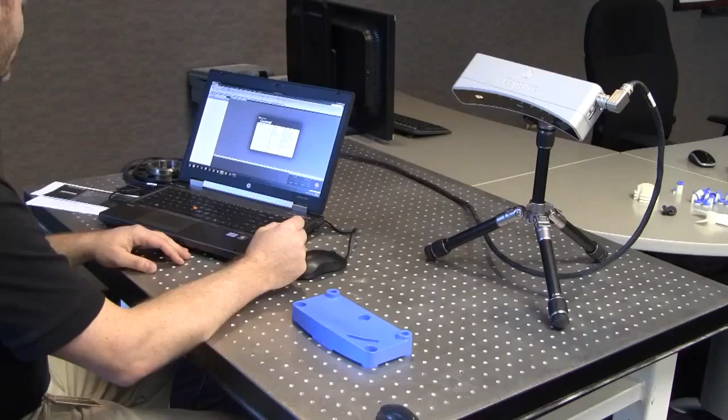The scanner is the Capture scanner. It's a LED blue light scanner with a 300 millimeter standoff, and the depth of field of the scan is 180 millimeters, from front to back. At the front of the field of view and the rear of the field of view, we have a diagonal measurement of 172 millimeters and 260 millimeters, so you can scan nice sized parts.

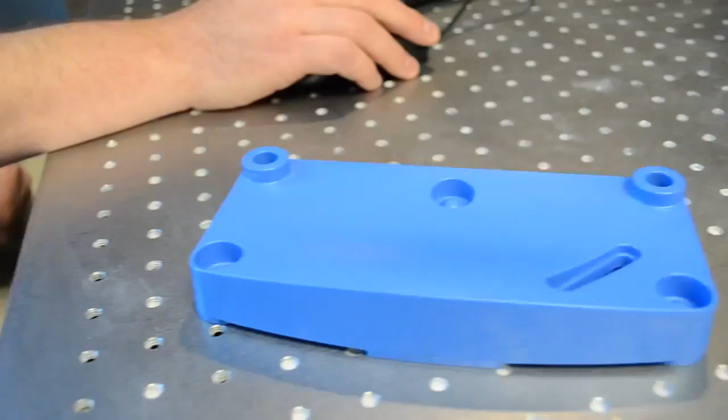What I'm going to do now is show Geomagic Control. We're going to scan the part into the system and do a quality evaluation on it.

To get started, we go to the Capture tab. Inside the Capture tab, we have a scan button. I'll click that and we'll automatically connect to the scanner. We'll see the light turn on and a dialog comes up, giving us a live preview of the part and the image we're going to collect.

This particular part, I'll take a couple shots and we'll combine those together in the software so that we have a single object that we can inspect.

Now we'll scan the part. For this particular part, we'd like to take a couple shots so we can circle all the way around. When the scanner scans, it can only scan what it can see, so as you can see, the backside here is obscured by the view. So what we'll do is take 7 shots as we rotate the part around, and the software will put the scans back together.

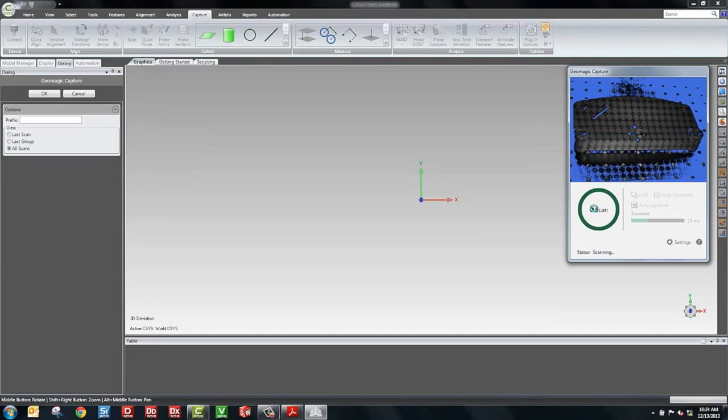I'm going to hit the scan button, and we'll take our first shot. The pattern moves around as the structured light captures the 3D data. On the screen, we can see our first shot.

Now I'm going to rotate this particular part about 45 degrees. This will give me an additional view of the part. We're going to go around the side.

I currently have it set to do alignment by geometry, so it's actually using the part geometry to align subsequent scans. This is fully automatic, provided you have adequate overlap between scans. You can see here that looks good.

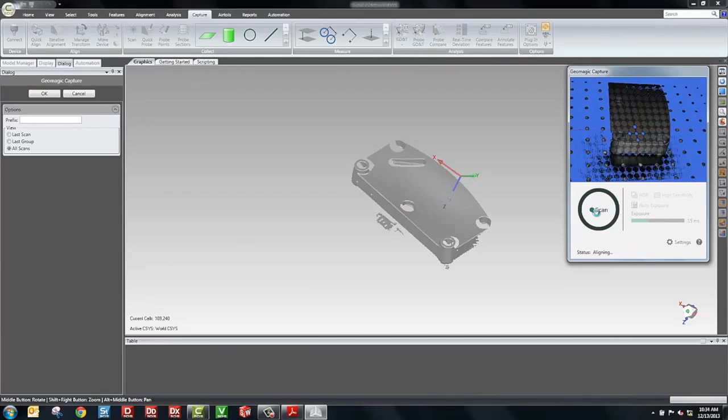We'll rotate some more. As you're doing the scanning, you can use the part and the part geometry. Other people will also use some targets on the part. Both are supported, so it depends on the type of part you're scanning. If the part doesn't have unique geometry as you go around, targets could be a nice way to optimize and make sure it aligns.

This particular part has a lot of geometry and it's pretty easy to align. You can see the process is very simple: you rotate the part, you move it, and you continue scanning. You can see the additional shots show up.

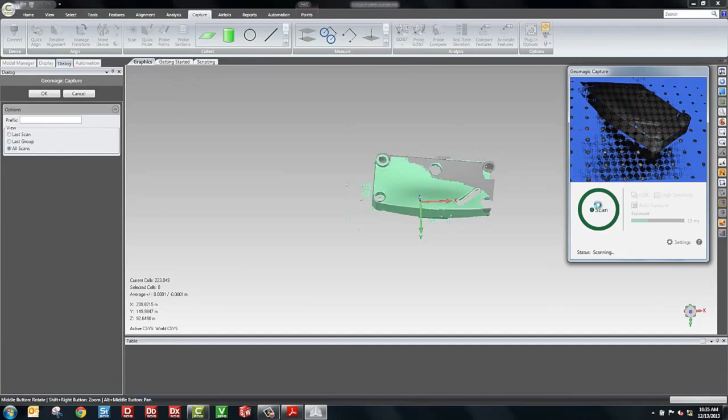The last shot, which is active, shows up in green. The prior shots are grayed out to show you that those are there, but they're not going to obscure the view. In this particular object, the scan speed is very, very fast with good contrast.

You can adjust the exposure setting, which will adjust for brightness on the part. For example, a darker part may need a higher exposure to capture the data, while a white part will require lower exposure. The scan speed is very fast, about 0.3 seconds, so we're able to capture a lot of data here very quickly.

We can see the model now on the screen, and if I open up the group, we have all the shots here of the part.

The last thing we'll do before inspection is combine these scans. Using the merge tool inside of Geomagic Control, everything happens automatically. We have noise reduction, alignment, and then the final combination, followed by decimation of the model if we need to.

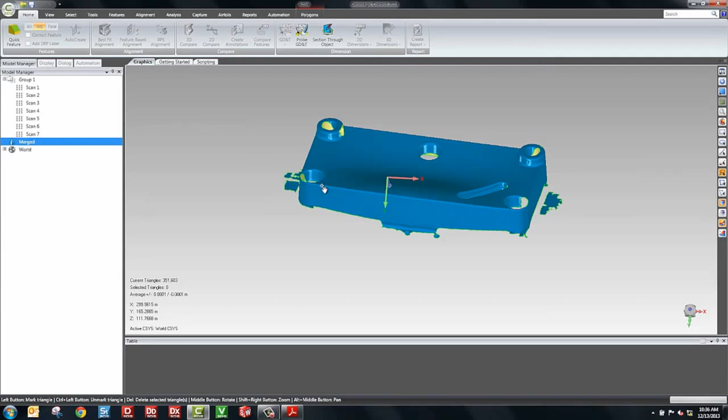For this particular model, I have a maximum triangle set of 2.5 million. Generally, you're going to have about 1 million to 1.5 million triangles from a scan like I did here. But here's the finished part. It looks great. We do have a little bit of the table, and the software allows us to very quickly and easily select those areas and hit delete to get rid of them.

Now, in an inspection scenario, you have a test object and a reference object. The test object is the object in question - you don't know if it's good or not. The reference object is the object you know is good. This would be a CAD model or an existing scan of a part that's the gold standard.

What I'll do is set this as test. The next thing we'll do is actually import our CAD model. We'll go to import and choose the CAD model. Here I have a step file - we can support a lot of different formats. Here we have our imported CAD model.

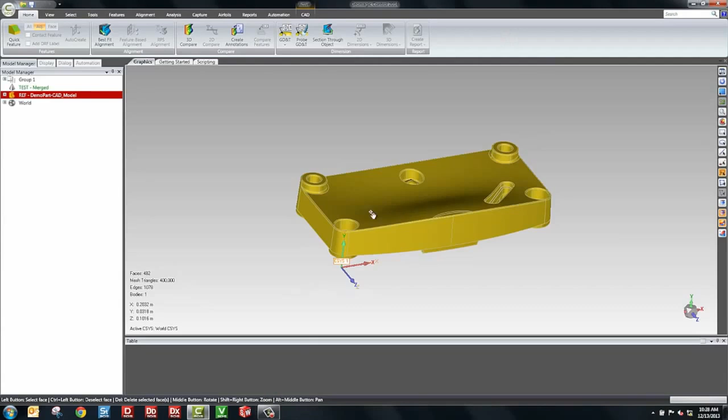Now the next thing to do is align the scan and the CAD. There's a lot of flexibility in scan alignment. For this part, we'll use best fit, and because we didn't scan the bottom, we can say let's use the top and the sides here, but not the bottom. It's very easy to select the faces you'd like to use.

Then we go into best fit alignment and click apply. The scan aligns to the part very quickly and nicely.

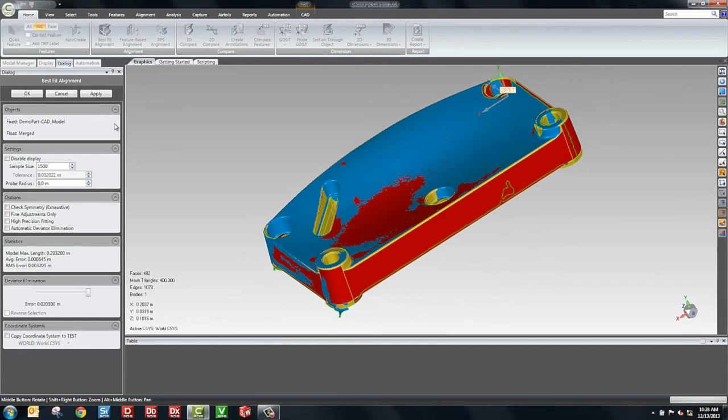The next part in the inspection process is to get a color plot. So we'll hit 3D compare and click apply, and the software will generate a color plot showing us the distance from the CAD model to the scanned data.

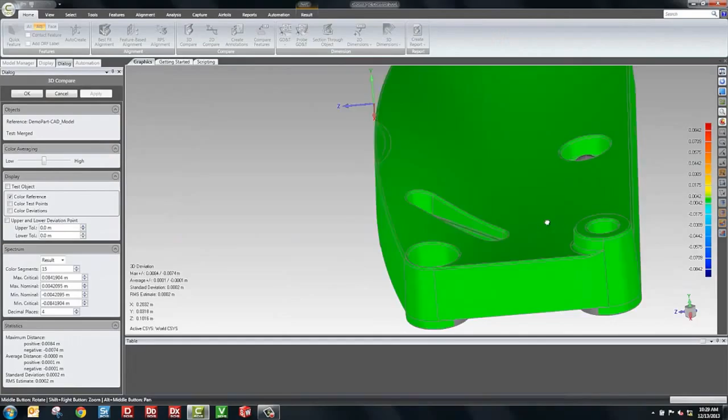Here we can see the part is generally all green. There are a couple areas that are a little bit light yellow. We can choose to adjust our color spectrum - this is where you would put in your nominal values.

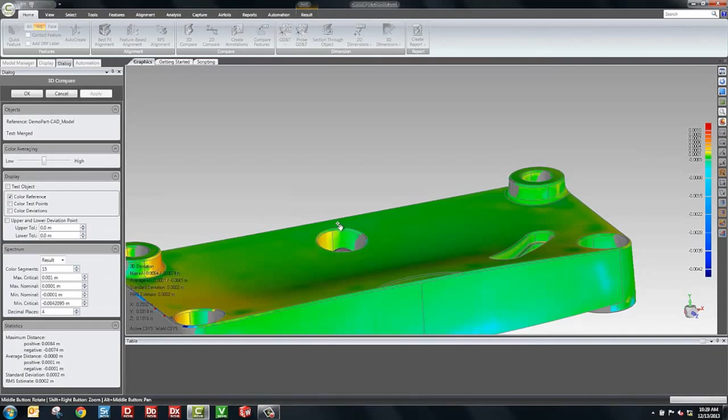Here I chose 0.1 millimeter and 1 millimeter. The values look really nice. We'll click OK, and then from here we choose what type of inspection, measurements, and dimensions we'd like to do. For demonstration's sake, we'll just create a couple annotations and then create a report.

Here are my annotations. We'll save that view and then cut a quick cross section and create a few dimensions. Here we have the view of the model.

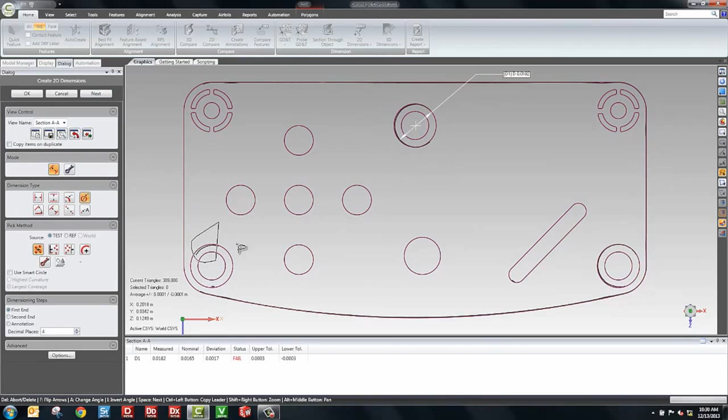What I like to do now is take a dimension, like a diameter here. We'll take a diameter of this circle, and another diameter of this other circle here. We'll click OK. The last step is to create a report.

So we go here and click on Create Report, and the software will now go through the process of taking screenshots and those dimensions we created, embedding them into a report. Something unique to Geomagic Control is the 3D PDF - we actually embed a 3D model inside of the PDF.

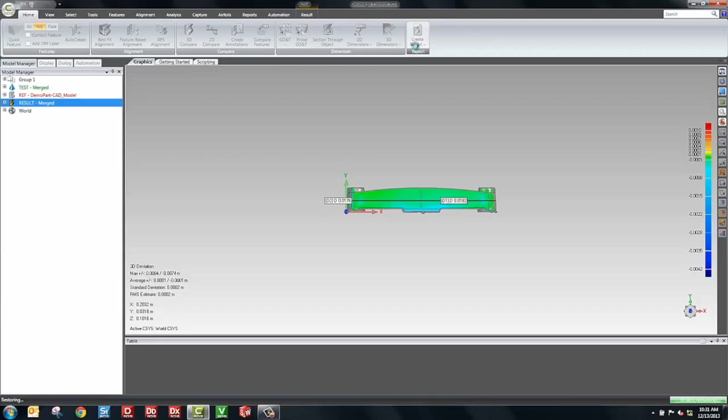Here's Adobe Reader, and on the first page here, we have a 3D model. This part can be rotated around. When I click on it, it loads a 3D model, and you can rotate this and see dimensions and annotations that we created before.

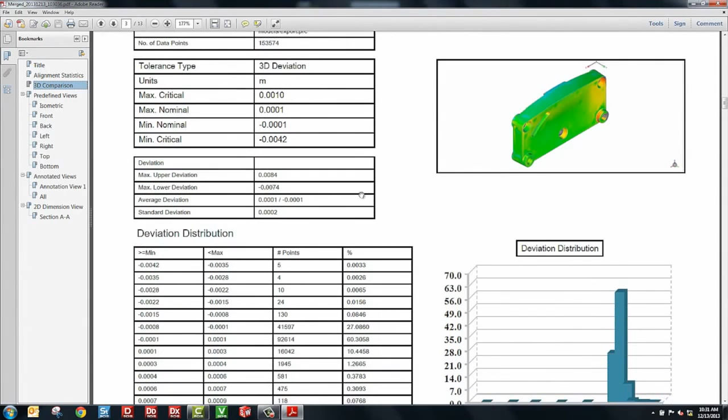If I go on to further pages, we can see we have statistics and information about the 3D comparison. Further through the report are standard views - front, back, left, right, top, bottom. Then we have our annotations, which are views showing particular callouts in certain areas of the model. Finally we have our cross sections and dimensions, which all have pass-fail values down in the table at the bottom of the page.